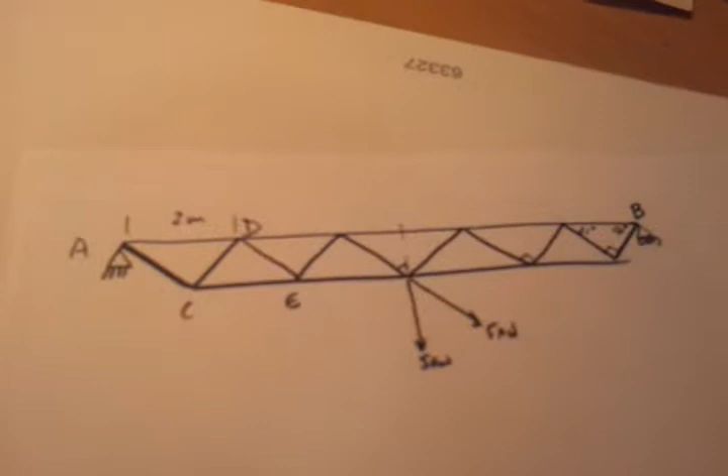Okay, here's a gantry truss, and you can see it's been supported on the left hand side with a fixed pin joint, which means that the reaction at this pin joint will not be perpendicular necessarily, certainly not with this force acting on an angle, this 5 kilonewton force. And we've got a roller joint over here, meaning that we're going to get a reaction which is at right angles to the length of the truss.

Okay, so we've been asked to work out what is the reaction at A and the force in the members CE and DE, those two.

So first things to do this, we're going to use the method of sections to work out the force in these two, but before we do that we've got to work out the reactions at A. Now I'm going to work out the reaction at B anyway, just to go through the process so that we can be clear on it.

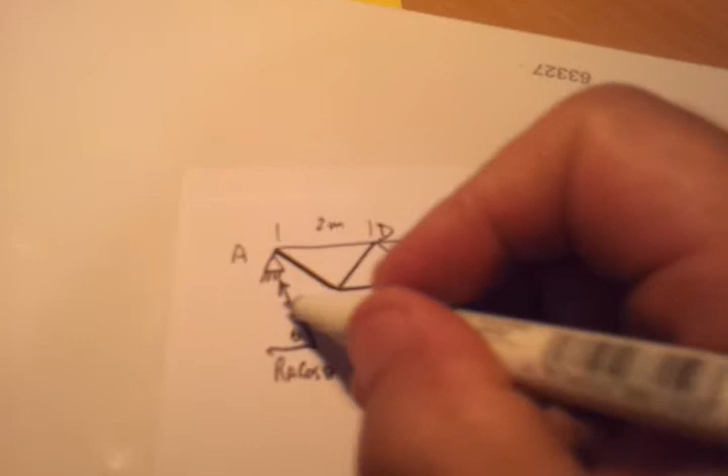First I'm going to say that the reaction at A, I want to define it a little bit. I want to say that it's going to be a reaction like this. I'm guessing it's going to be that way, and it's going to make an angle theta with the horizontal, and it's going to have a horizontal component called RA cos theta, and a vertical component called RA sin theta. So I'll resolve those into horizontal and vertical components.

Next thing I want to do is look at this force here. Rather than play around with this 5 kilonewton force and work out perpendicular distance when I take moments about points, I'm going to split it up already. So I know that angle is 45 degrees, I've been told this in the question.

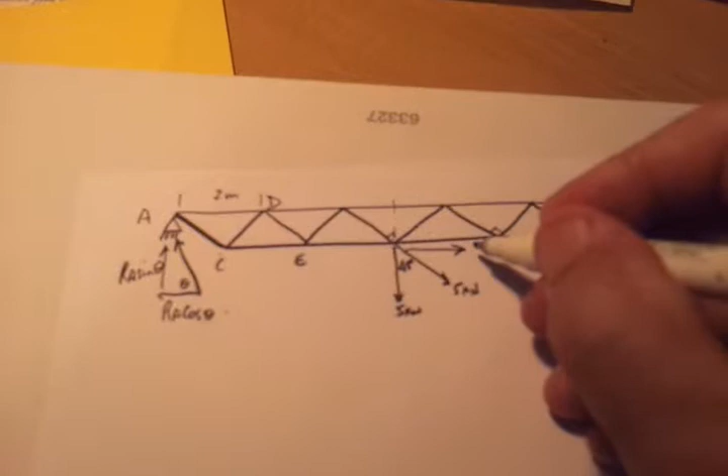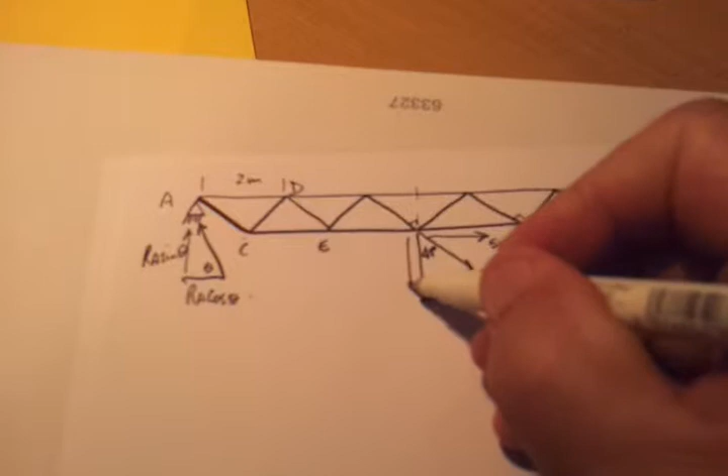So I would fairly safely assume that we've got a force here which is acting there, which is going to be 5 kilonewtons sine of 45 degrees, and I have an additional force down here to resolve this 5 kilonewtons, 5 kilonewtons cos 45 degrees. Now they're going to be equal because of the geometry of this thing. I've worked out that 5 sine 45 degrees and 5 cos 45 degrees, because sine cos is the same, sine of 45 degrees is the same as cos 45 degrees.

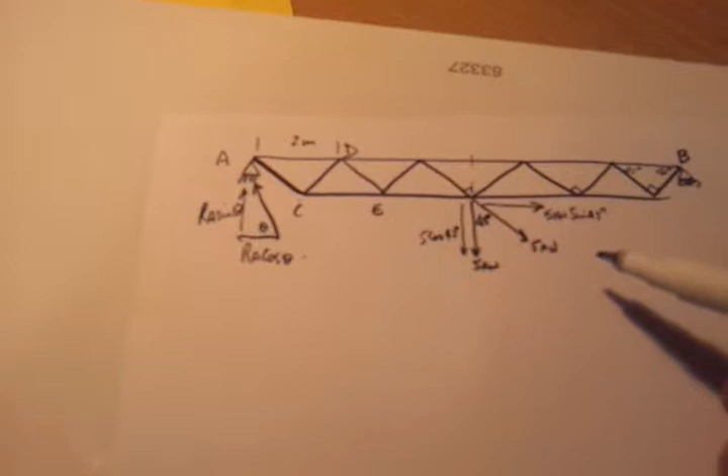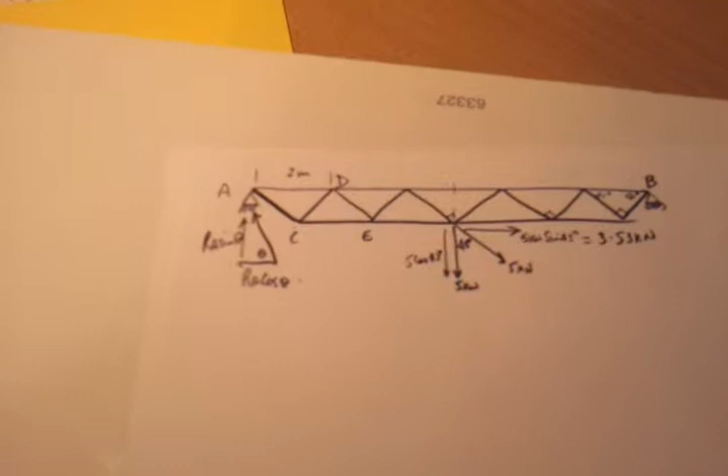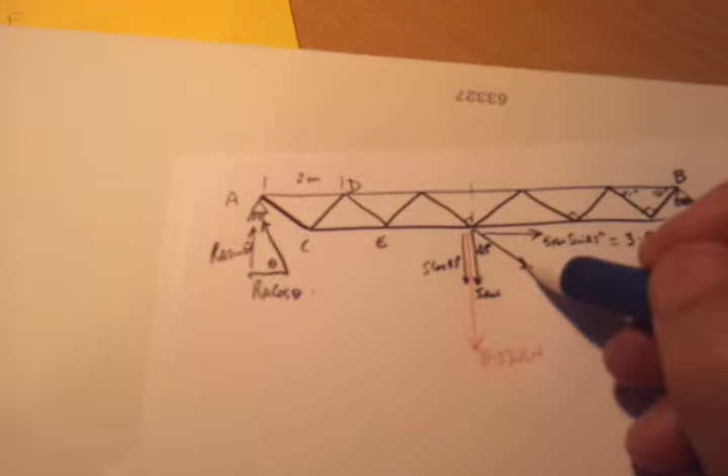Worked out that sine of 45 degrees is going to be equal to 3.53 kilonewtons, and so is cos, which makes it we're going to have a total force down here, which I'll use a red pen to indicate, a total force coming down here of 8.53 kilonewtons. So it's the sum of the 5 kilonewton force plus the vertical component of this 45 degree 5 kilonewton force. So 8.53 here.

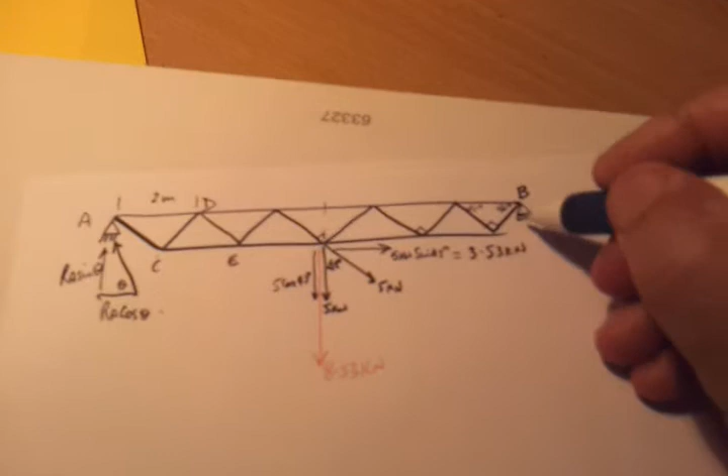We've got a force acting up through here. We've split it up into vertical and horizontal components. And we've got RB, which I haven't indicated yet, but there's RB. It's going to be vertically upwards because of the roller joint.

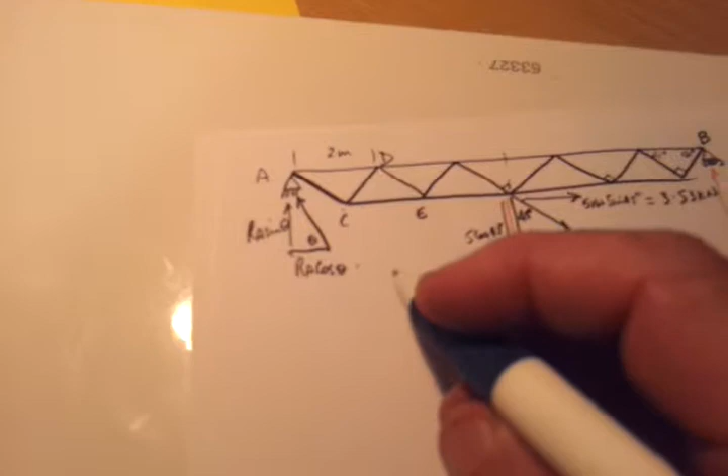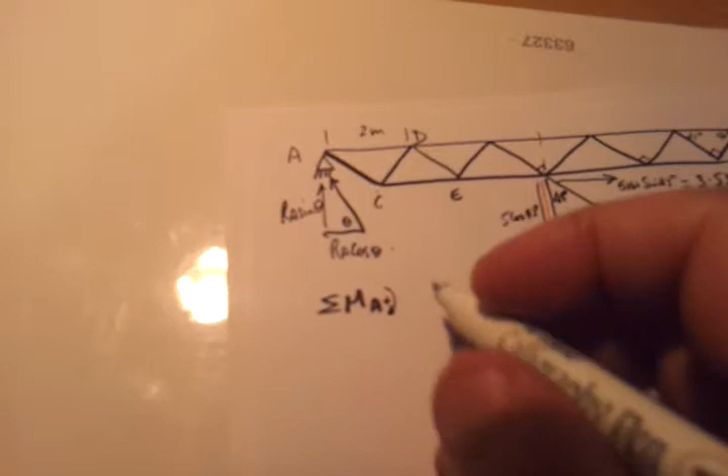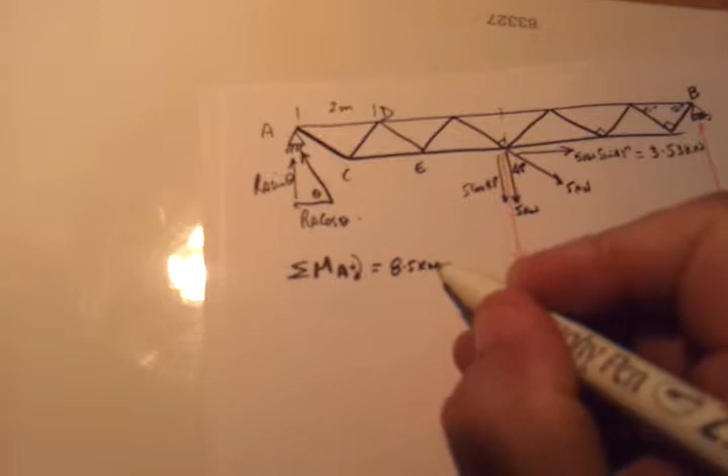Okay, now to solve for RB, let's take the sum of the moments about point A, and we'll make it this way positive for argument's sake. We're going to get an 8.53 kilonewton force multiplied by this distance here. We've told that's 2 meters, so it's 5 meters.

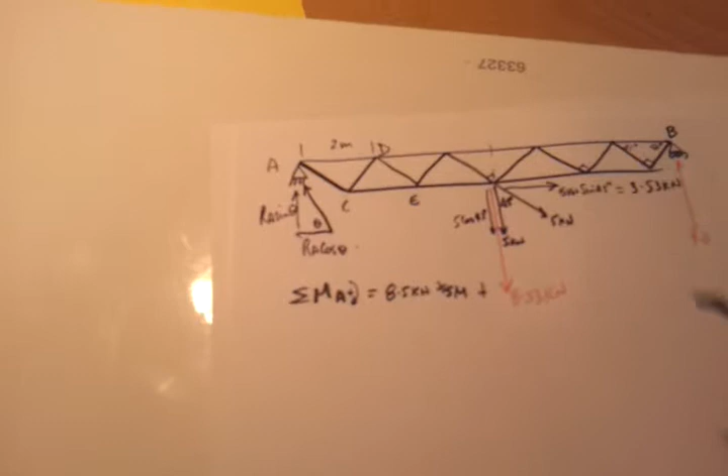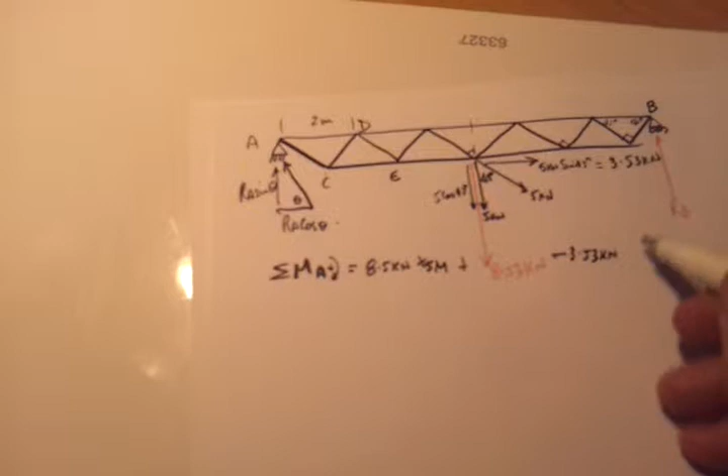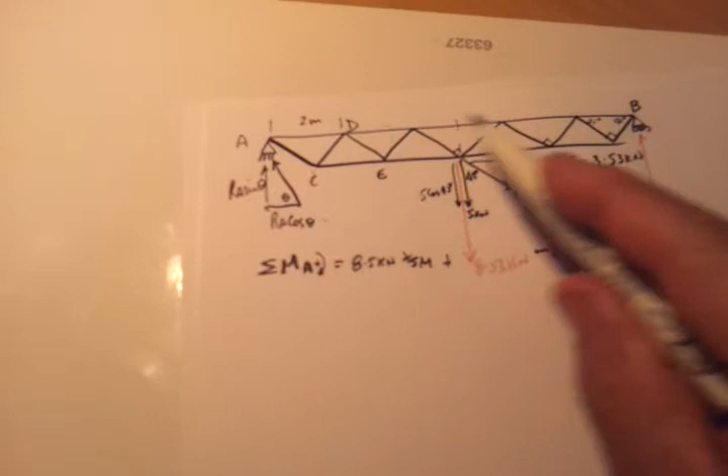And plus, so moments about A, this force acting downwards. We've got this force here, which is the horizontal component of that angular force that we had, the 5 kilonewtons. It's going to be acting 1 meter away from the pivot point at A, so it's going to be acting in an anti-clockwise direction, so it's minus. So 3.53 kilonewtons times 1 meter, because that's the depth of the truss down here. And lastly we've got minus RB multiplied by the full length of the truss, 10 meters.

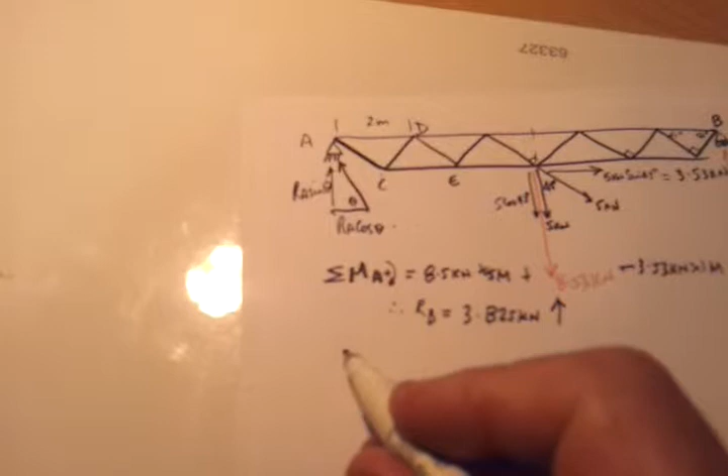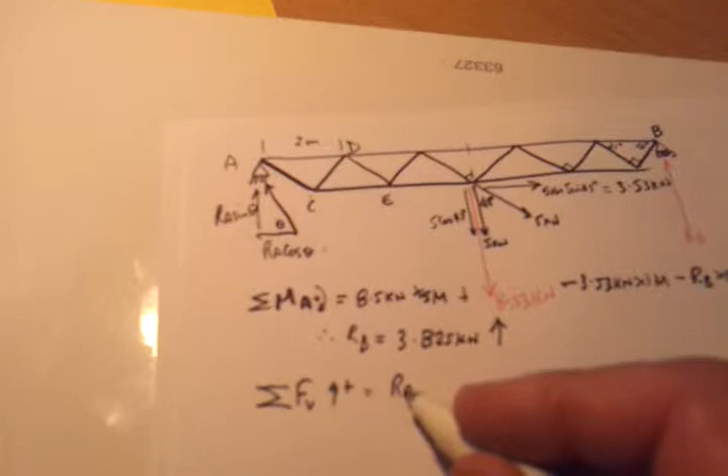Alright, now let's do sum of the vertical forces, indicating this way positive, upwards being positive on the page. And we're going to get the component here, Ra sine theta, minus the 8.53 kilonewton force acting downwards, plus Rb

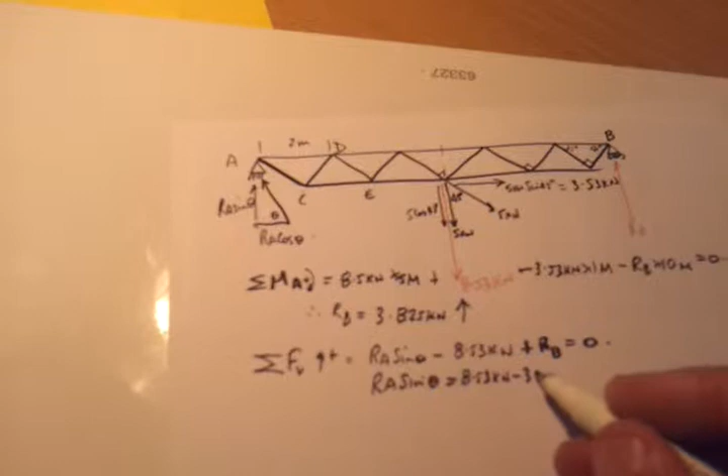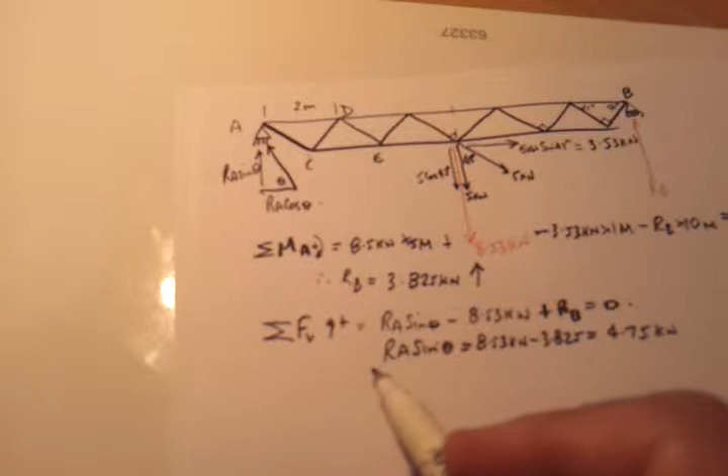equals 0. And from that we can get that Ra sine theta is going to equal to 8.53 kilonewtons minus Rb, which we've already worked out to be 3.825. So that now equals 4.75 kilonewtons. So we've solved for the vertical component of that force. We'll call that equation 1.

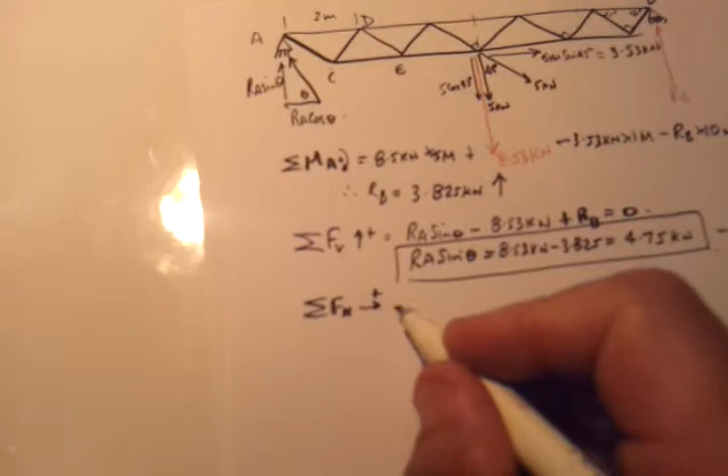Now let's take the sum of the horizontal forces, this way positive. There's not many horizontal forces going on here. We just have this component here. It's positive because it's to the right, so it's Ra cos theta, and we've got this component over here, which is 3.53.

Oh, I beg your pardon, we should watch that.

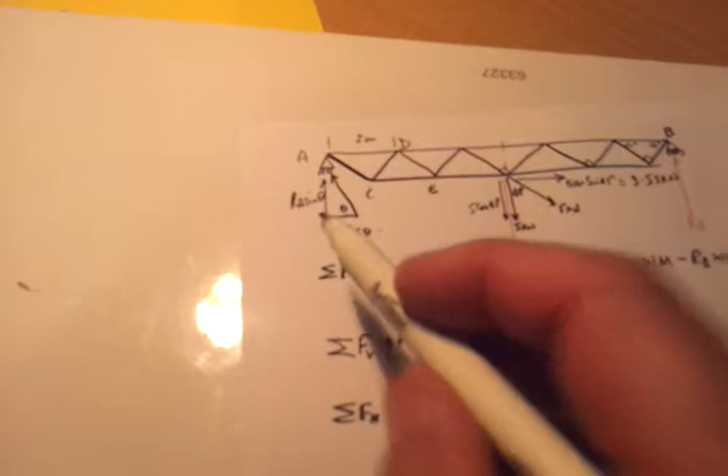That's negative, because it's pushing this way to the left, it's negative Ra cos theta, positive 5 kilonewtons sine 45 degrees, which is 3.53 kilonewtons, equals 0. So from that we can say that Ra cos theta equals 3.53 kilonewtons. We'll call that equation 2.

So dividing 1 by 2 produces tan theta equals 8.53 kilonewtons divided by 3.53 kilonewtons. We've got rid of the Ra, it simply disappears when we do the division.

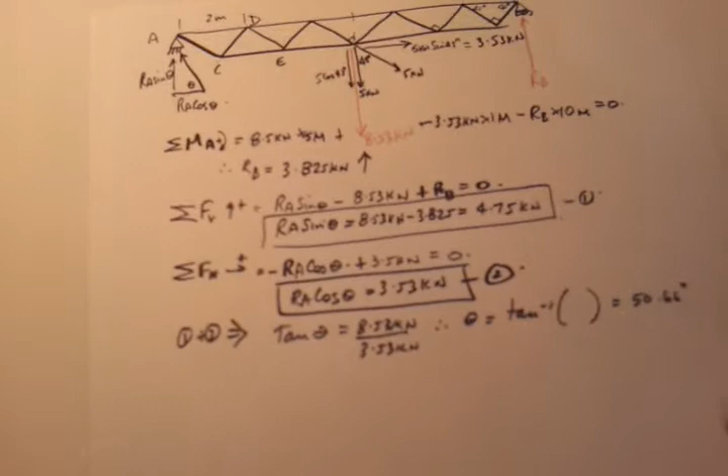And from that we get theta equals tan to the minus 1 of that result, which equals just over 50 degrees, 50.66 degrees. And it's the correct direction because it's positive, so we've guessed it correctly. So it's going like that.

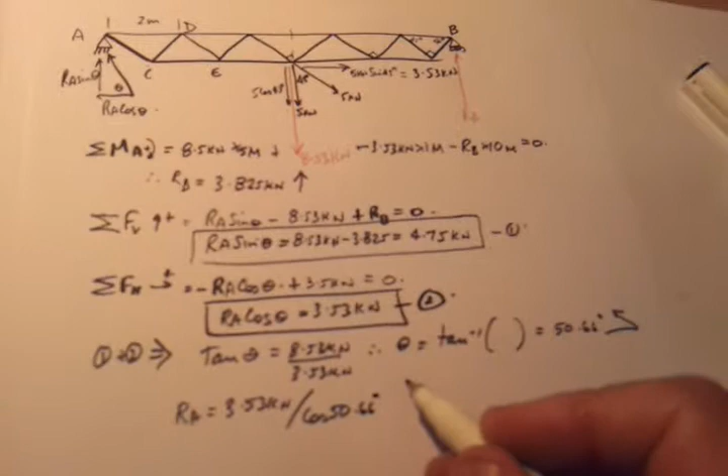So we've got the angle of the reaction. Now we need to work out the reaction itself at A. Plugging this angle back into equation 2, Ra is going to equal 3.53 kilonewtons divided by cos of 50.66 degrees.

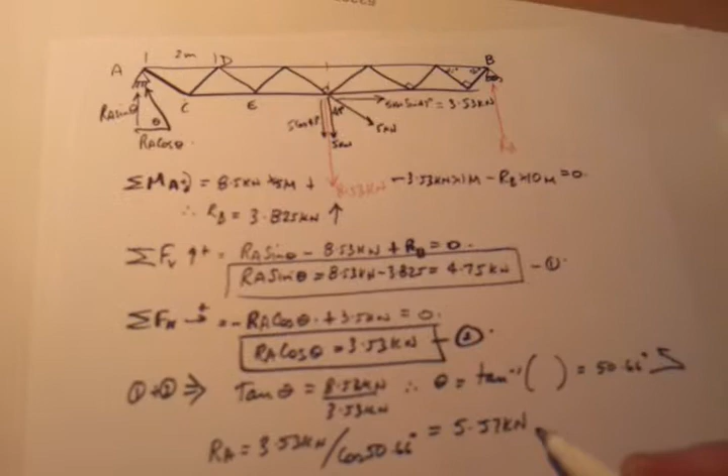Not really doing it in my head, but I've worked it out already. It's 5.57 kilonewtons. It's positive, which means we've guessed the angle correctly. It's up that way. So there it is. So there's Ra. That's the first part of the question worked out, which is the reaction at A.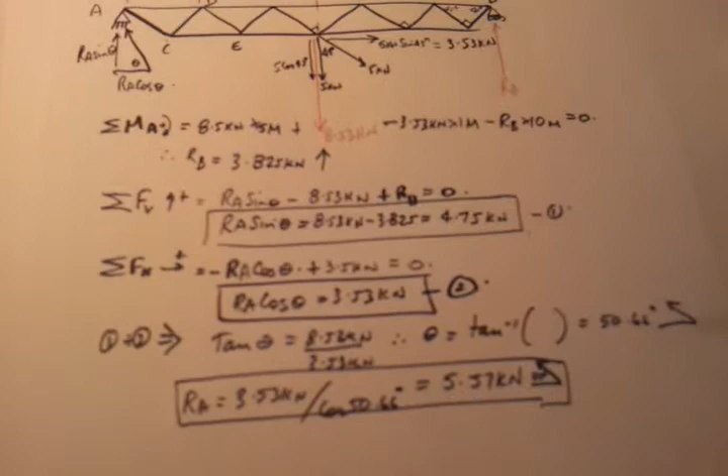Now the next part of the question deals with the method of sections. The method of sections relies on the fact that all parts of a truss will be in equilibrium, or any object will be in equilibrium, regardless of whether you slice it in any section.

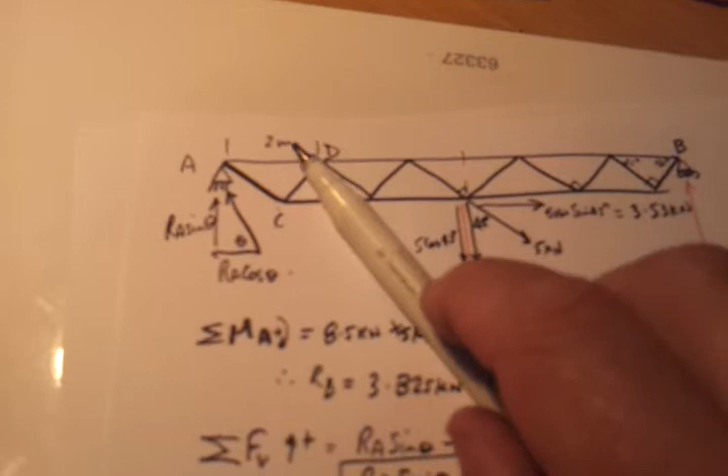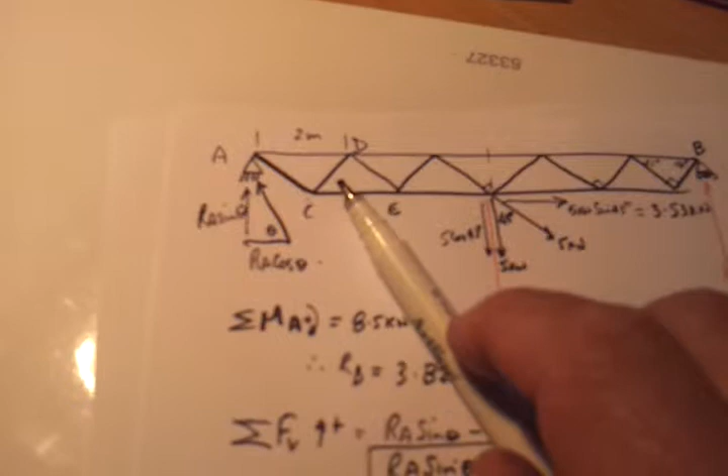What it means is that if we slice down a section through that truss, all the external forces will match all the internal forces in magnitude and be opposite in direction. So internal forces, if we take a slice, have to come into play to create balance. I want to create a slice through CD and DE.

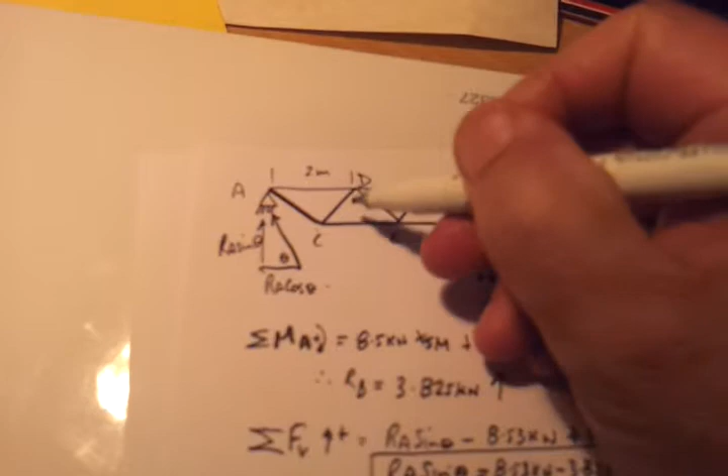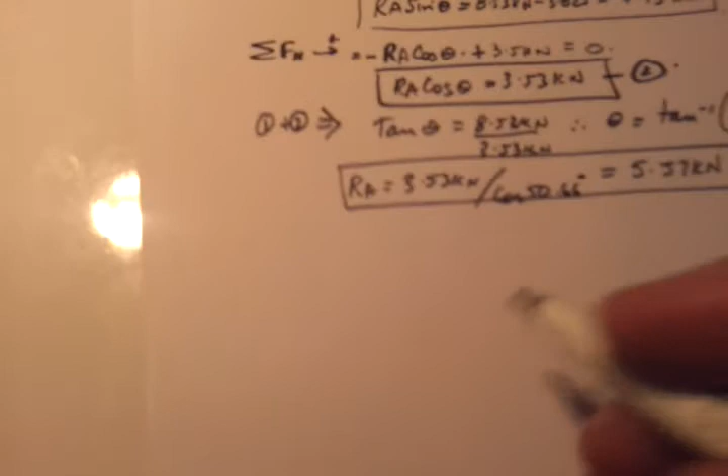So I'm going to take a slice down through here like this, and I'm going to redraw it down here for you so it looks a little bit more clear. We're going to have a section of the truss going like that, another section coming down, going up here, going out there, and there's the section line that I've taken.

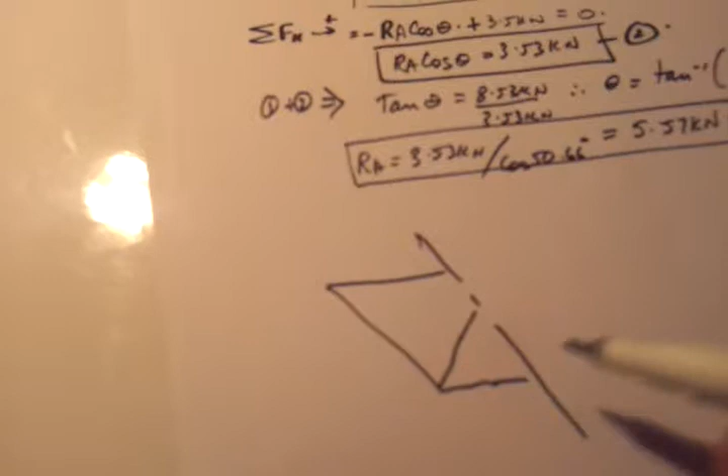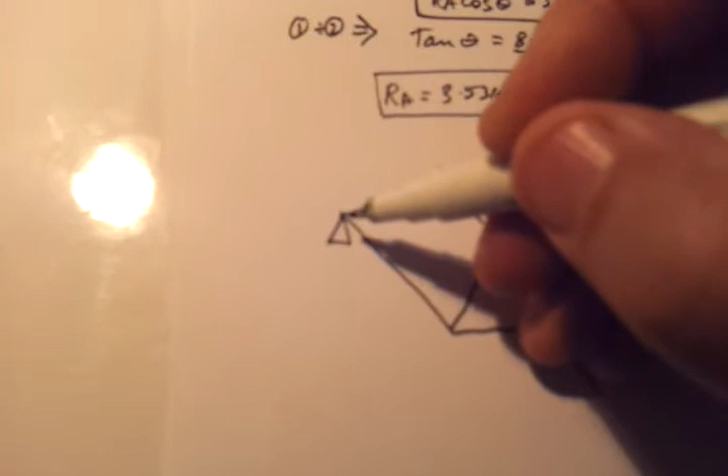Given all that, we're supported here at A, so we've got two forces, and I'm going to use horizontal and vertical components at A rather than the angled force, because when I come to taking moments, horizontal and vertical forces make it a lot easier for me.

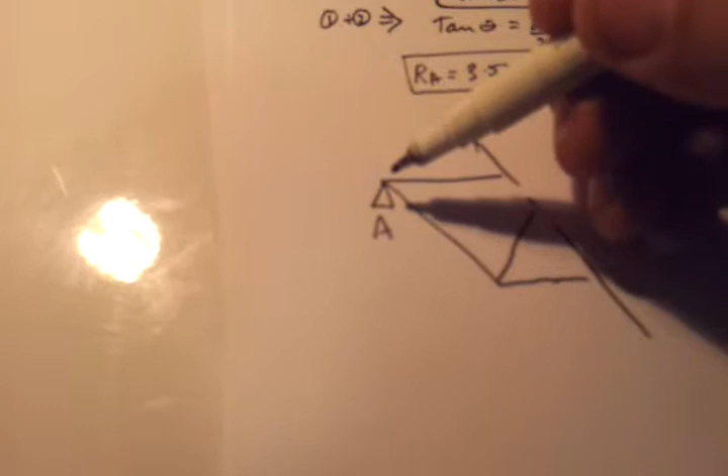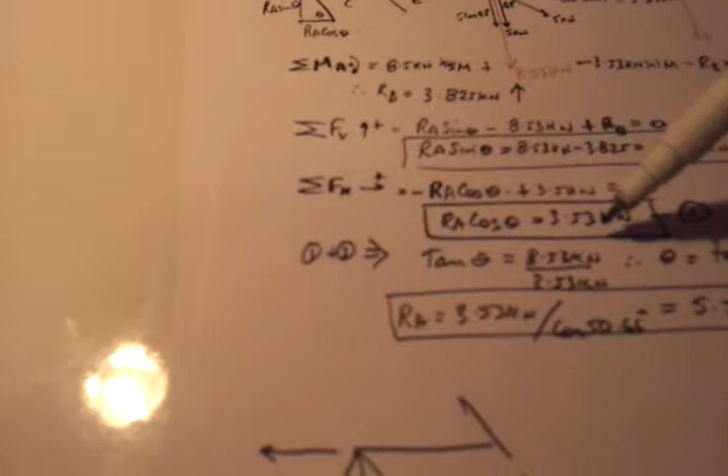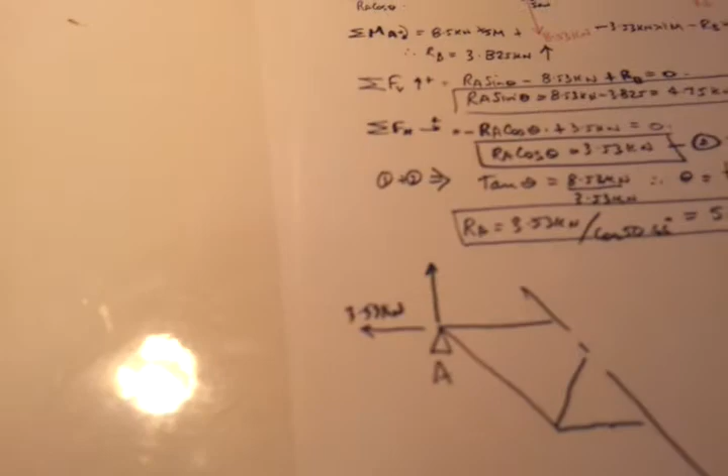So I know I've got a force acting here at A called Ra cos theta, and I know what Ra cos theta is from my previous working. It's 3.53 kilonewtons. So I've got a 3.53 kilonewtons force here, and I've got a vertical force here which is Ra sine theta.

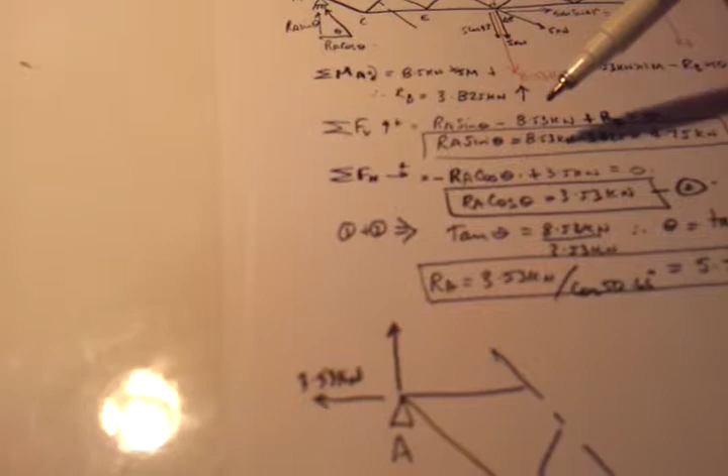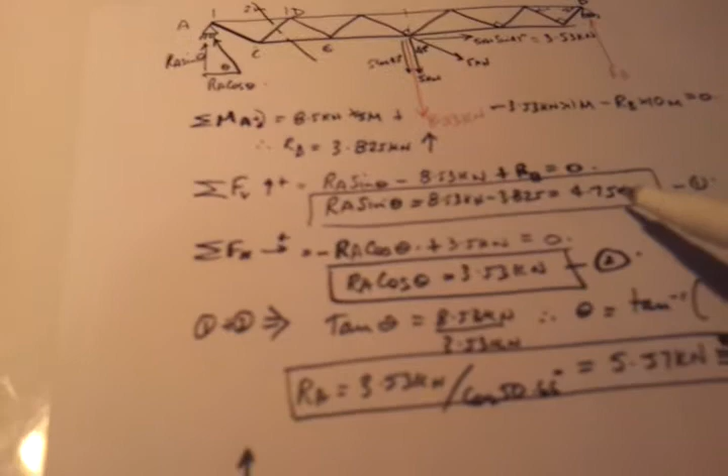And I know that Ra sine theta is flying around up here somewhere, Ra sine theta, yeah, there it is, 4.75 kilonewtons. So it's 4.75 kilonewtons in the vertical.

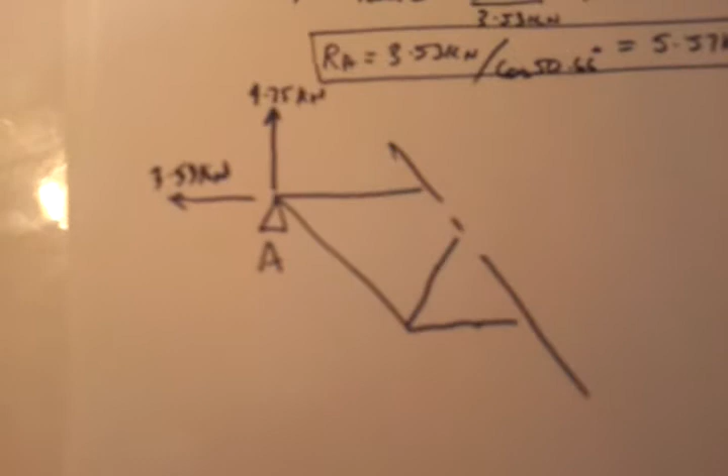Alright, so I've got this section. Now I'm going to have to do something else. This is not going to be balanced without some opposing forces coming through these members. I'm going to guess that the top member over here will be in compression, so its internal forces will push away towards the joint. That's usually a compressive force.

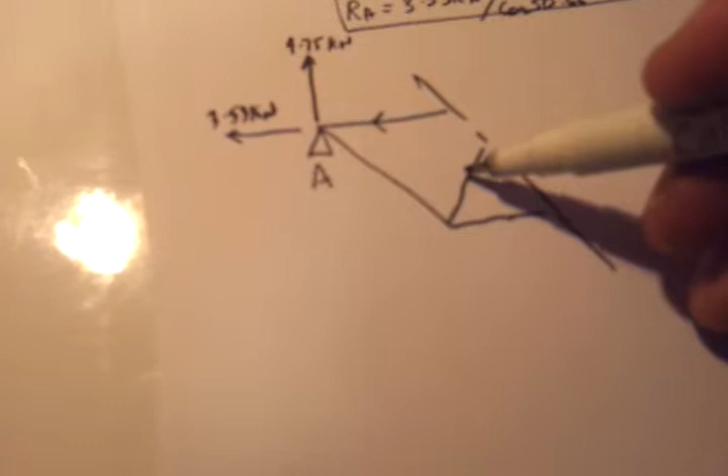Now if I get this wrong, it's okay. The answers will indicate with a negative if it needs to change direction. But at the moment I'm going to guess that, and I'm going to guess that this too will also be in compression, and that force will be in tension. As I said, it doesn't matter which direction you choose the arrows to be. If you end up getting a negative result for one of these forces, it means the arrow had to be in the opposite direction.

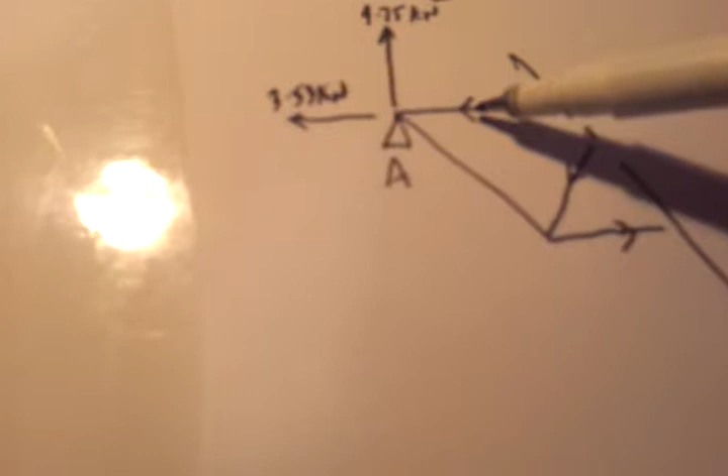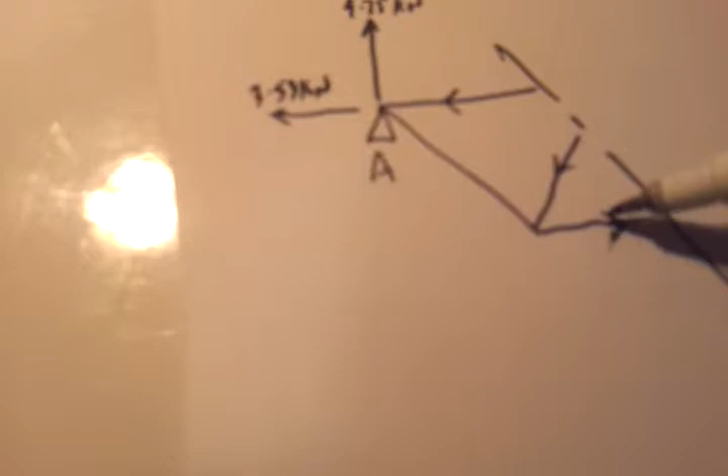So these are compression forces, a reflection of the internal forces pushing back outwards, resisting the compressive force pushing inwards. On the bottom chord of the truss, the opposite is happening: this is an internal resistance force pushing inwards, resisting the outwards bend. If you can imagine the truss, it's going to be bending, sagging in the middle. You would expect tension on the bottom and compression on the top of the truss.

Okay, now if I extend these lines over here, so you can see the dotted lines, when I take my moments, I'll label this according to the instructions.

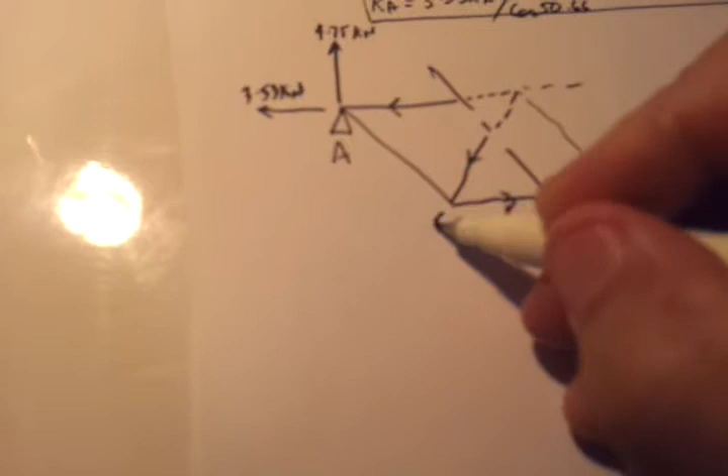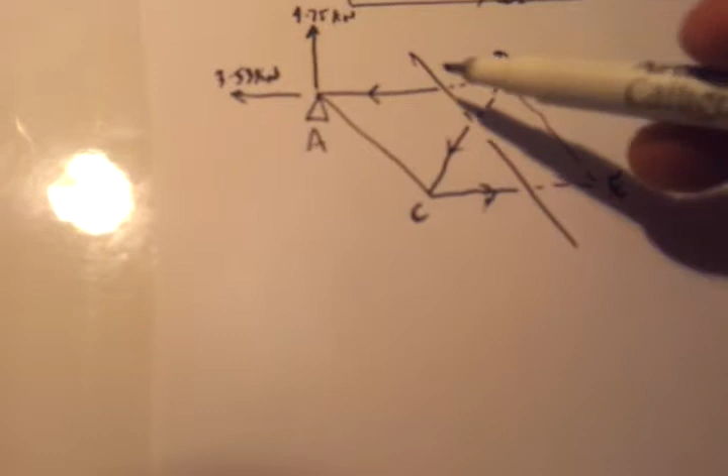The real skill here in the method of sections is learning how to take moments in the right spot to save yourself time and effort. When you do a slice, you should always try and slice no more than 3 members that you are not aware of. And when you take moments about that slice, try and make sure that you take moments about the joining section, the point through which two of the forces would flow, leaving the third force exposed for you to calculate.

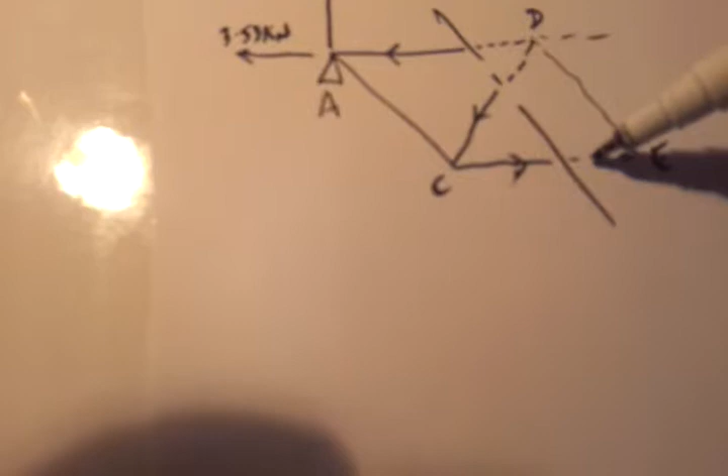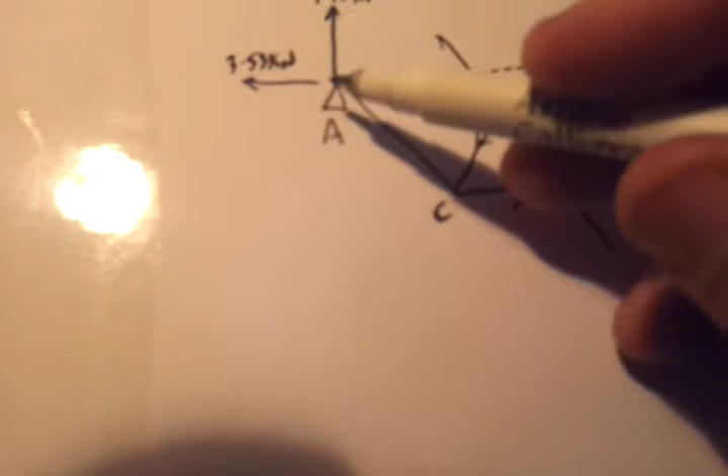So my first moment is going to be a moment about D, because if I take a moment about D, I eliminate these two forces, I'm left with these, and in fact I don't have to worry about the horizontal force because that also goes through D. And I've got this vertical force here, which I know the distance for because I've been given it before - it's 2 meters.

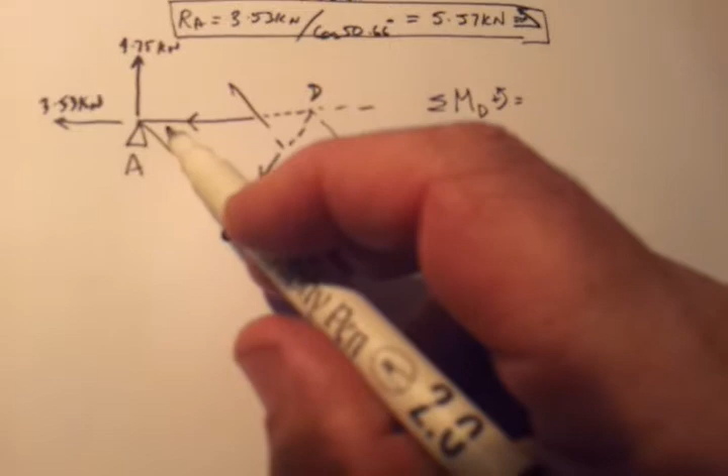Alright, so given all that, let's take moments about D. We'll make this way positive - as long as we're consistent it doesn't matter which way we take. So that's going to equal force CE times the perpendicular distance down here.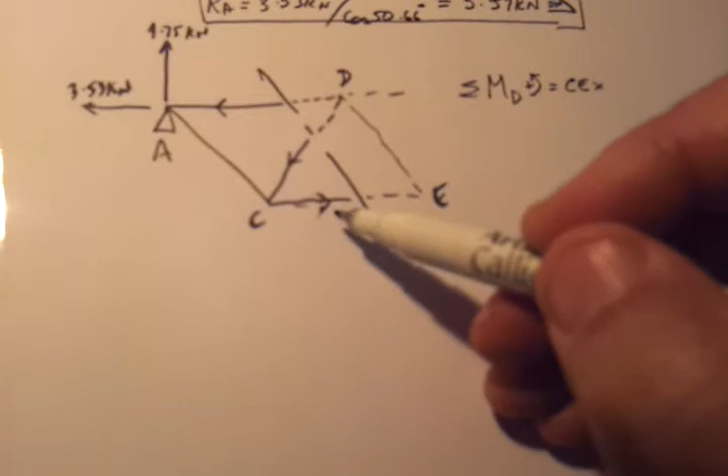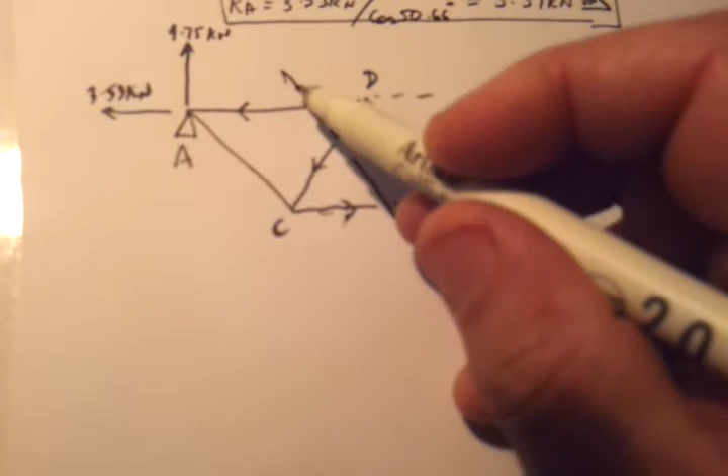And what is that distance? Well, if that's 2, and each of these sides, or that's 1 meter, because we're told that information, that this is 1 meter and this is 45 degrees, then the perpendicular distance from CE to D is 1 meter, so it's CE times 1 meter.

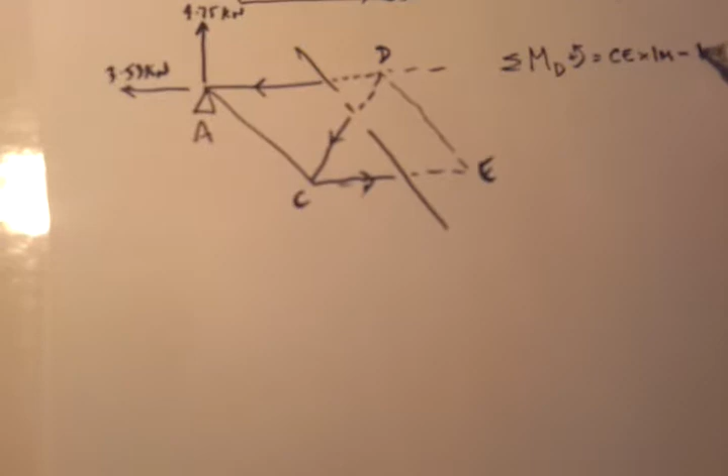Minus this force over here, which is 4.75 kilonewtons, multiplied by this distance here, which is 2 meters.

Okay, so it's easy enough to solve for CE. CE becomes 8.61 kilonewtons, and because it's positive, it means that I guessed the correct direction, meaning that the bottom member is in tension. If it was negative, I'd have to reverse the arrow and say it was in compression.

Okay, now next thing, I want to be able to solve for CD. So I need a place to take moments about which would eliminate AD, which I don't want to work out, and eliminate AC - I don't need that. So really the obvious point is taking moments about A.

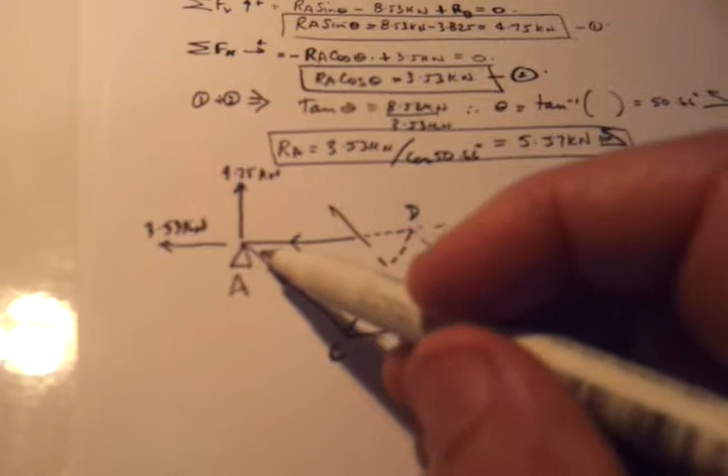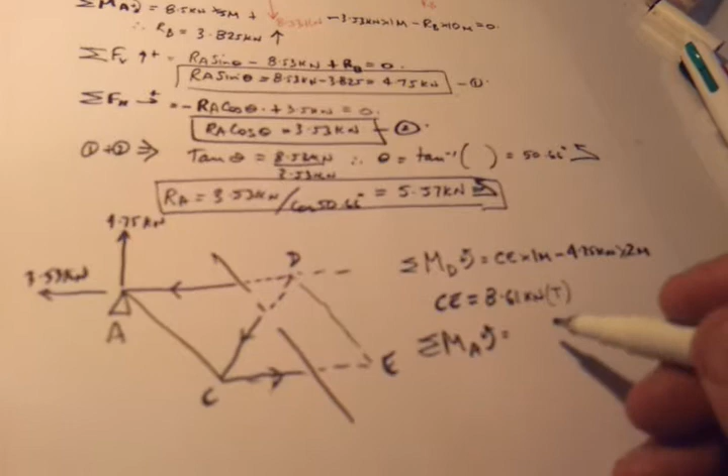And I'm just left with CE, which I've already worked out, and CD, which I want. So I'm going to take moments about A, and make this way positive again. So with that I get my CE force, which I already know to be 8.61 kilonewtons, multiplied by the perpendicular distance from A - that's this distance down here.

Now by Pythagoras, this is 2, this is, well we already know that, times 1 meter, plus CD - this is where I'm going to need my Pythagoras - plus this CD distance here, multiplied by the perpendicular distance. Now that is a right angle, though it may not look so, because this is 45 degrees and that's 45 degrees. We know that from information given to us.

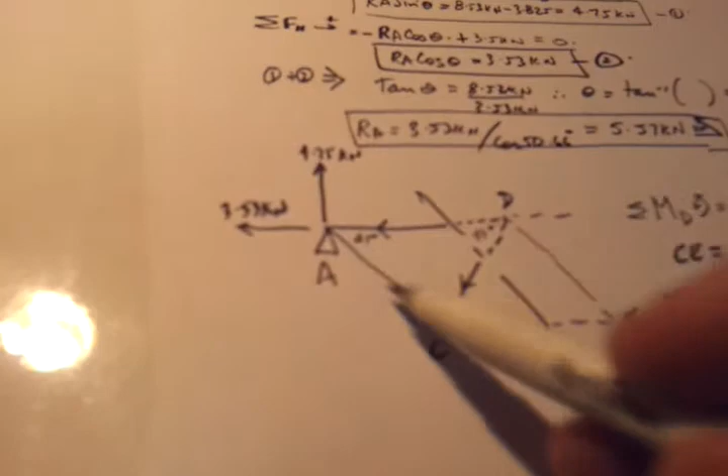So if that's 45 degrees, then that's a right angle. I only need to work out this distance here. And if that's 2, this distance over here from A to C is going to equal root 2.

Okay, so what that means is that we can now solve for CD, which is what we want. We find that CD is going to equal 6.09 kilonewtons.

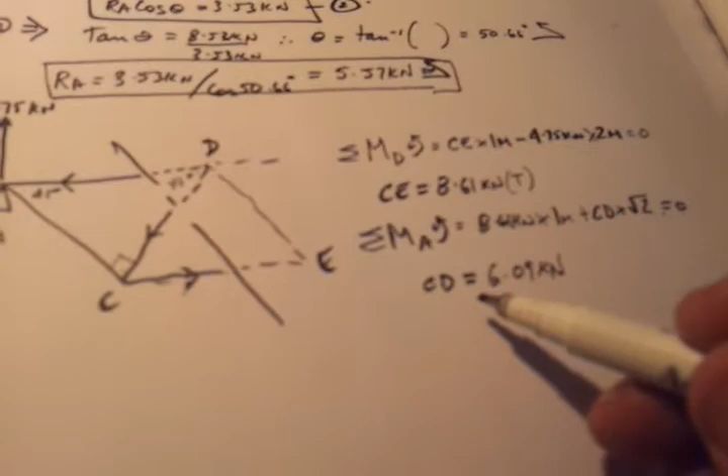And because it's positive - that all equals 0 by the way, conditions for equilibrium, sum of the vertical moments have to be 0 - CD is going to equal... oh, one thing I forgot to mention is that CD is rotating around this way, making it - oh, I had the direction rotating around that way, see the arrow pointing down here - which means that really CD here should be minus CD, not plus.

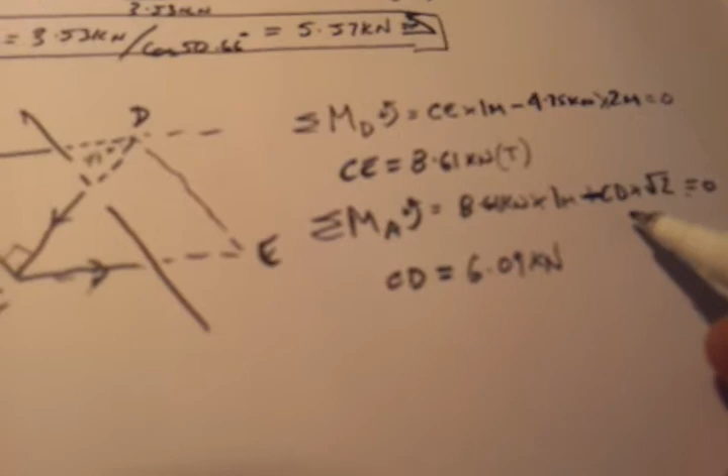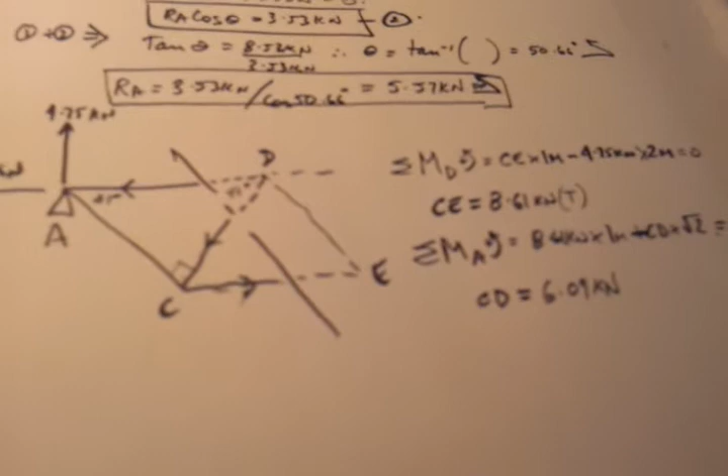Minus CD, which of course means that the overall result for CD is positive, giving me the correct sense that I've chosen as being a compressive sense on this member. Sorry about that, okay, that's sorted. So CD is 6.09 kilonewtons, and that'll also be in compression.

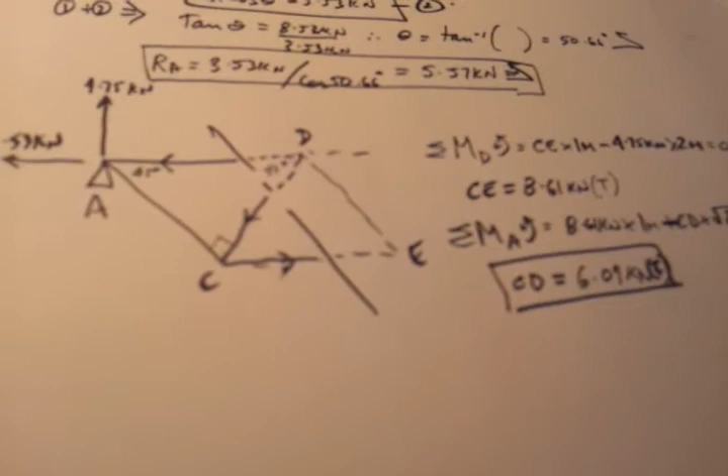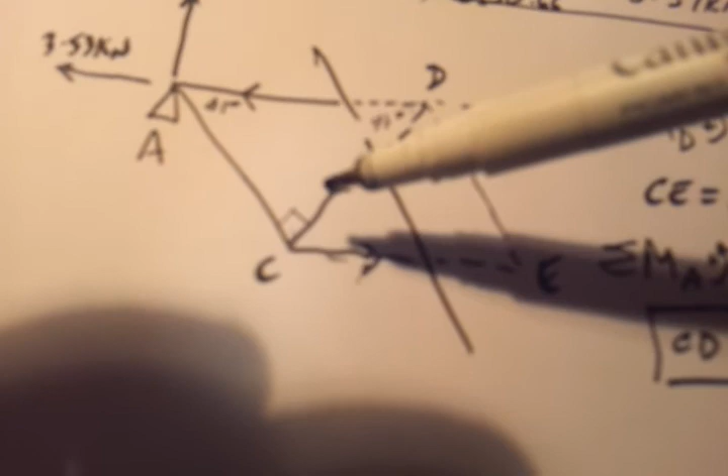Okay, so there's your method of sections. Again, the thing to be aware of is that you choose your senses of your forces wisely, and pick the point where to take moments in such a way as to eliminate 2 of the forces and leave 1 force remaining, which you can easily solve for. I hope that was helpful for you.